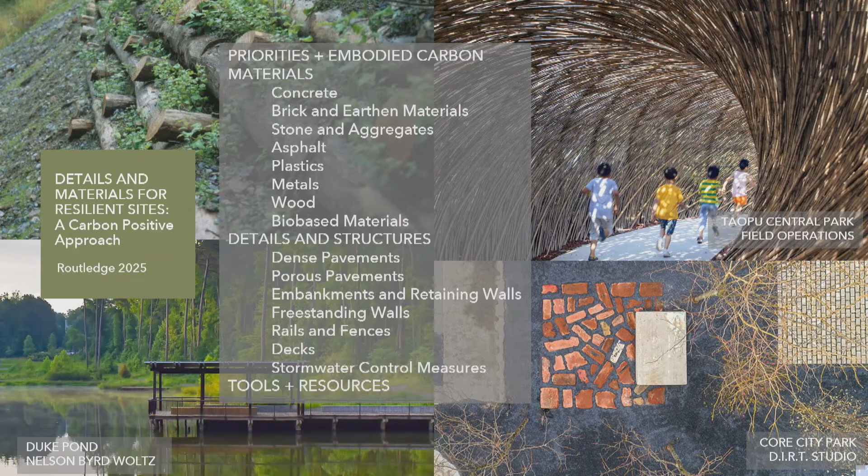But for the past 6 years, we have averaged a 1.4 degree Celsius increase in global temperatures worldwide. This is urgent. We can't have incremental change anymore. We need substantive change. I am truly fearful about what is happening to our climate. So I am building on Pamela and Chris's work with the intention to provide landscape architects with tools to meet the Climate Action Plan goal. I'm writing a book with the working title of Details and Materials for Resilient Sites, a Carbon Positive Approach, that will provide a roadmap for low carbon site construction.

During this fellowship, I have crunched the numbers and quantified just how big of an impact site construction materials have. Here's a parking space. We all know how big that is, right? And here is its carbon footprint. It's bigger than the parking space. This is a sphere 10 meters in diameter for a concrete parking space. 80% of the embodied carbon of a built site is from the construction materials used to build it.

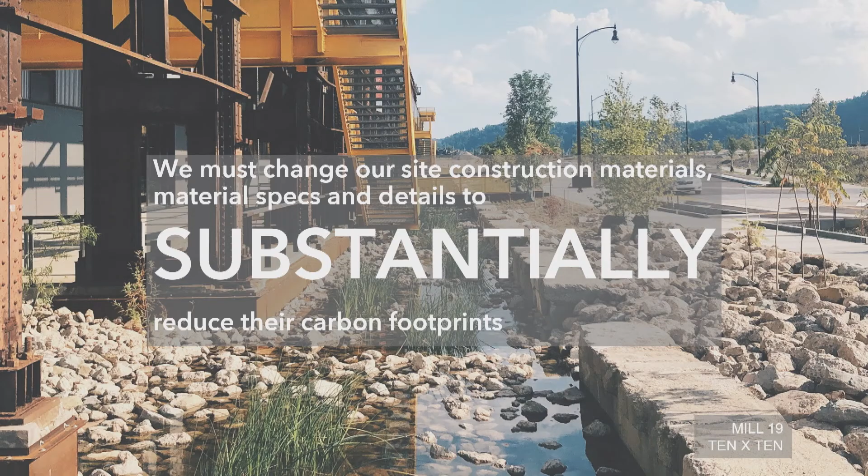We cannot have incremental change. We've been working on that since 1999 or even longer. We are not going to meet the goals of the Climate Action Plan unless we have substantive change, unless we make a radical shift in our material specifications and detailing to decarbonize construction. There are a variety of solutions that we can use to effect substantive change. And these are the approaches that I'm covering in my book, and I'm going to take you through some of them this evening.

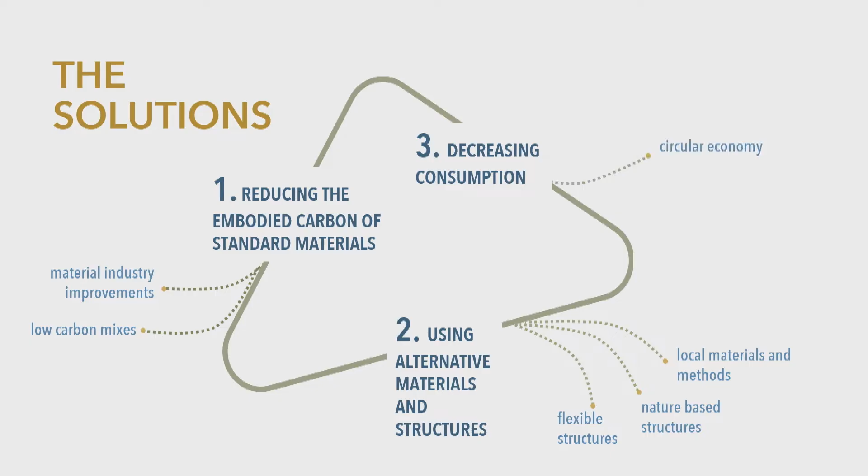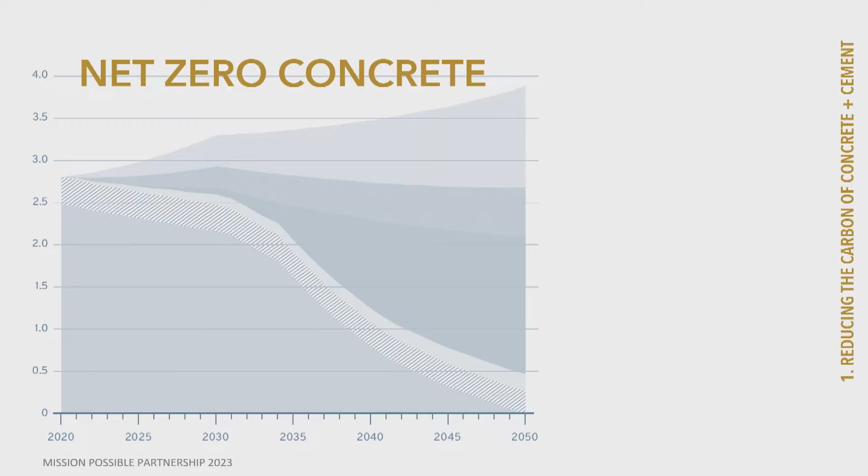The first is to reduce the embodied carbon of standard materials. We are always going to use concrete, and that's fine, but we can make improvements in the materials industry from the supply side. We can make improvements from the demand side by specifying lower carbon mixes. So what does this mean? And I'm a little bit picking on concrete because concrete is responsible for 7 to 8% of all global emissions. Remember our parking space. The industry has plans to decarbonize and achieve net zero by 2050.

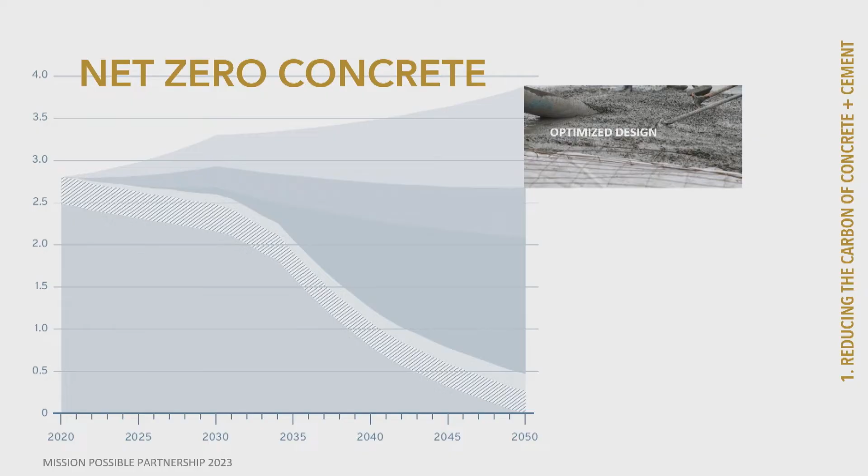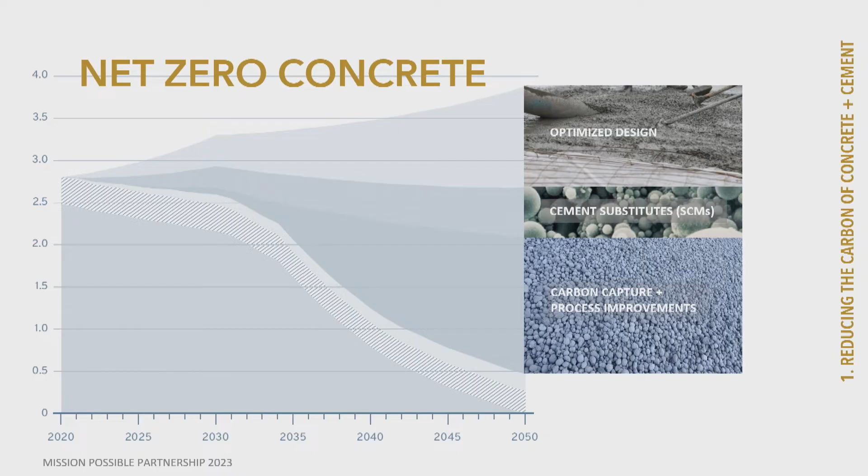The Mission Possible Partnership has laid out a pathway, and various industries around the globe have done that as well. They're all very similar. The first is to optimize design, build smaller, more efficient structures, use the lowest strength concrete for the job. We regularly specify 4,000 PSI when we could be specifying 3,000 PSI for many structures. Using cement substitutes like fly ash, blast furnace slag, calcined clay, et cetera, or even alternative cements that are finding their way to market. The industry can capture carbon and make other process improvements, and then of course, they can use renewable energy. Other industries are making these improvements as well. This is just an example.

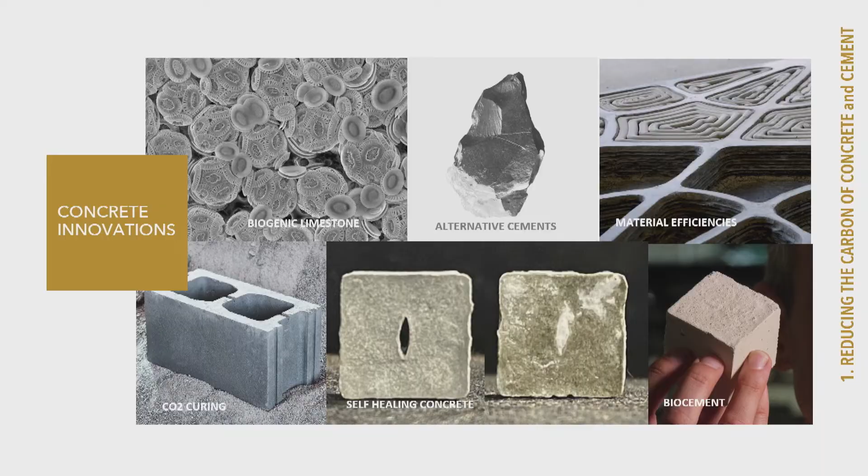The other thing is that there are so many concrete innovations on the market, and we love to read about them. The biogenic limestone, the self-healing concrete. These are great, and they are the future of concrete, but they're not readily on the market yet. So we need to do some things in the meantime. The next step is to use alternative materials and structures.

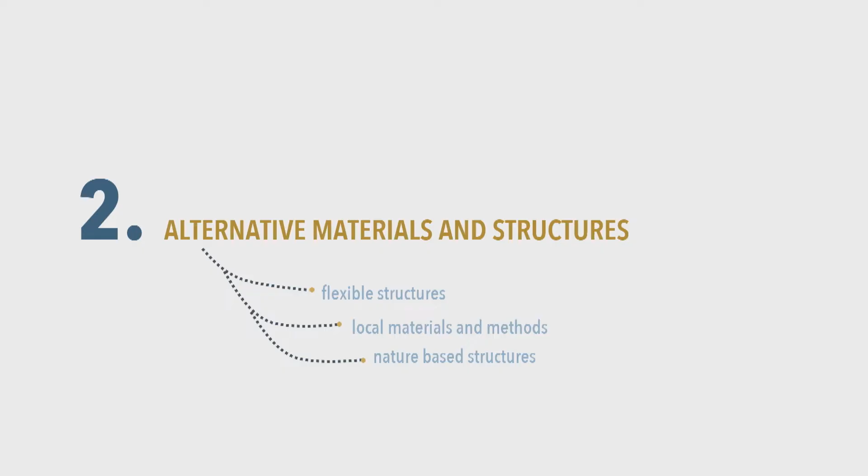Building flexible structures instead of rigid structures, using local materials and nature-based solutions. During this fellowship, I have compared the embodied carbon numbers for many site structures: pavements, walls, fences, guardrails, decks, etc. I've crunched a lot of numbers.

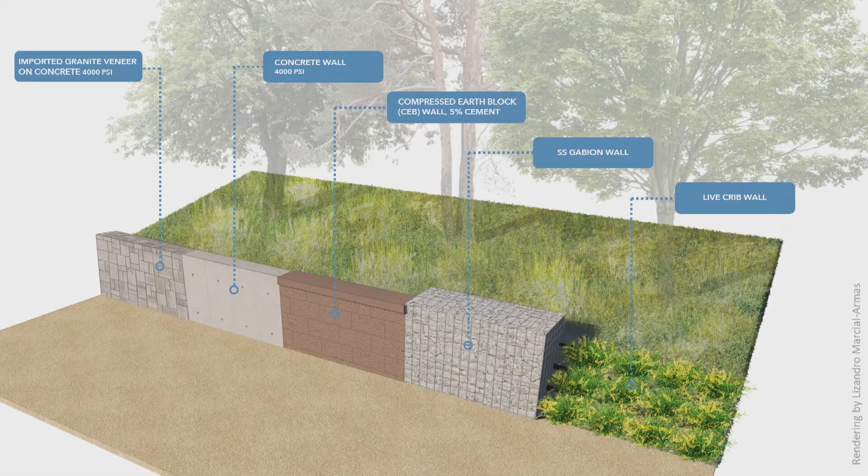In this example, I have looked at a 10-meter long retaining wall. And I included standard assemblies, imported granite on a concrete stem wall, a concrete retaining wall, compressed earth blocks, some alternative materials, gabions, and a live crib wall. I looked at the wall stem, the footings, the drainage behind the wall, et cetera, and crunched the numbers for these. These figures are for the cradle to gate phases of the materials. I did not factor in transportation to the site.

Here are my results, and here's a little bit how to look at it. Along the bottom are all the structures, the granite veneer wall all the way over to the vegetated crib wall, and along the side are low, medium, and high for embodied carbon. And just to give you some context, the 3.3 tons of CO2 equivalents for the imported granite veneer wall, 3 tons, think back to our parking space example where a ton is 10 meters across.

All right, so that's not the full story though, because we can look at ways to reduce the embodied carbon. For instance, if we use domestically quarried and worked granite, not domestically quarried and sent overseas and sent back granite, we can reduce the embodied carbon by 25%. If we use cement substitutes, we can further reduce it to 33%. And if we make just a thinner wall, if we do a 9-inch thick wall instead of a 12-inch thick wall, we get down to 43%. So we're starting to come in line.

We can do the same thing with concrete. You can knock 15% of the embodied carbon off just by using 3,000 PSI concrete instead of 4,000 PSI. That is the easiest fix in the world. I'm not saying build weak structures that are gonna fail, but I'm saying use the correct PSI, don't over-design. Using 50% cement substitutes brings it down further, and then all the way to 47% by using a 9-inch thick retaining wall instead of a 12-inch thick wall. We can even improve the alternative materials by using cement substitutes here as well.

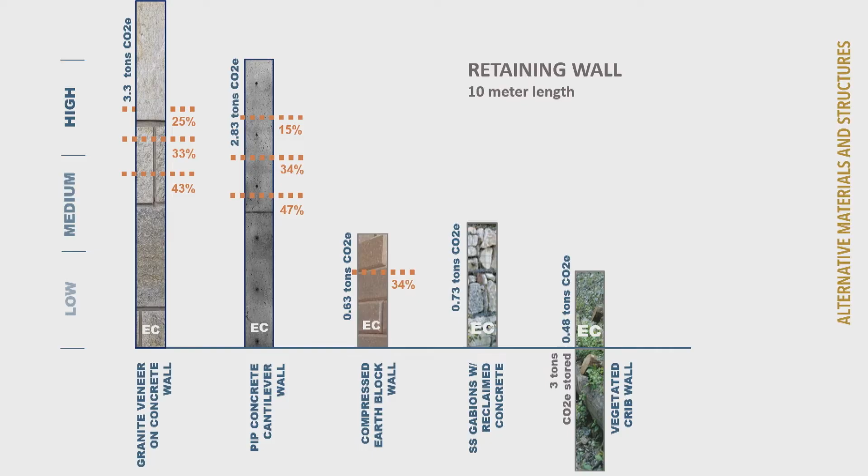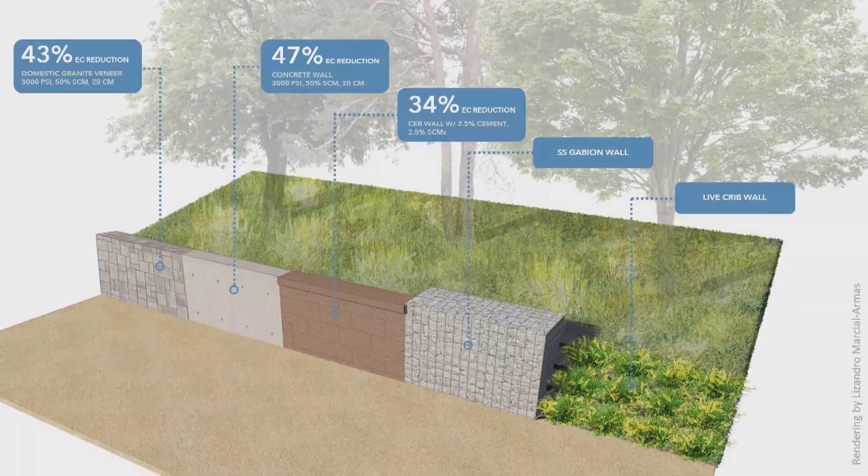But the only wall here that's going to sequester carbon, that's going to store carbon, is the vegetated crib wall, and it will store 3 tons of carbon equivalents for a 10-meter length of wall. So the lesson here is that we can use standard materials, but we just need to change the way that we specify them with alternative mixes, smaller structures, local materials.

All right, so in a few minutes, I'm going to tell you we need to move substantially toward bio-based materials. So I thought I'd show you a deck board comparison that I did. This is decking for a 9 by 12 meter deck with 16-inch joist spacing, and the deck boards sized for that span. You also see replacement factors, because not all of these deck boards are going to last the same amount of time. For a 30-year deck, we will have some replacements with some of these deck boards, and so those are also factored in with the embodied carbon.

So here you see the embodied carbon of the three woods, the pine, the pressure-treated pine, the thermally modified ash, and the tropical hardwood are very similar. This doesn't count the transportation from the factory gate to the site. The tropical hardwood is coming to the US from South America or Southeast Asia, which is quite a long way. The fused bamboo, unfortunately, is coming from China, because it's not currently produced in the US, although I wish it would, because it's a great product.

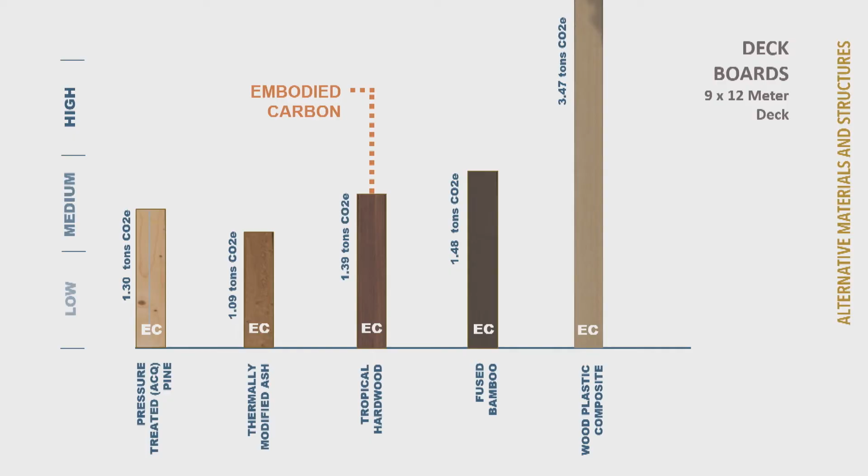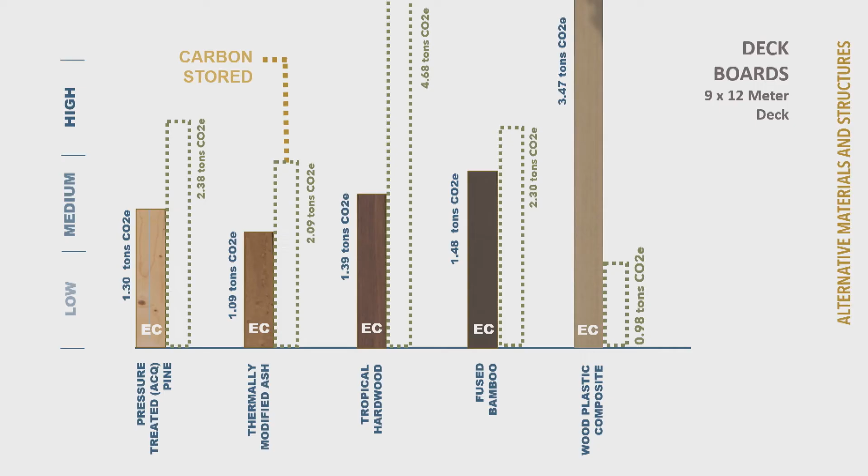This is the carbon that is stored in this decking. This decking can be considered carbon neutral or even carbon positive if the wood is harvested for the decking and new trees are replanted on the site where the wood was harvested. So that's entirely plausible with the pine and with the ash, but it's not going to happen with the tropical hardwood. It's just not. So there's a huge impact there. Stay tuned on the carbon stored story, because it's being discussed right now whether it's legitimate to actually count the carbon stored in lumber and other bio-based building products.

But most importantly here, we see the ecosystem impacts. And I've defined that as a combination of habitat loss combined with the likelihood of reforestation. To build our 9 by 12 meter deck, it's entirely possible that we could get certified lumber for the pressure-treated pine and the thermally modified ash. I'm not sure that we can trust certified lumber when it's tropical hardwood, because there is a lot of fraud in the industry, particularly in Brazil. But also, very little tropical hardwood is plantation grown.

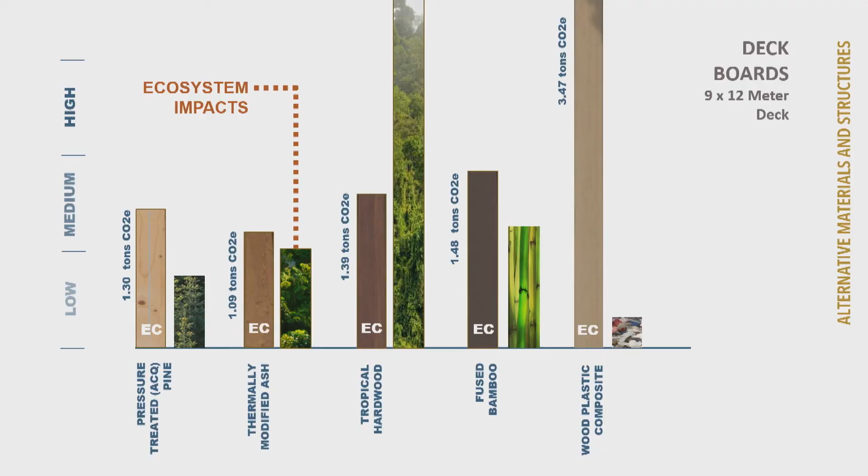So to obtain our tropical hardwood, we would need to disturb 1.68 acres of rainforest. It's not that we need to cut down all the trees, it's that the tropical hardwood trees that we derive the lumber from don't occur that often in the rainforest. For instance, an ipe tree occurs on average once every 5 acres. So that's why we need to cut down 1.68 acres.

And even if we just selectively harvest the tree, studies show that the rainforest, when it loses its keystone tree, will decline within 5 years and become pasture land. So the other thing that we need to consider is the carbon sequestration consequences of that. When the forest is gone, our tropical hardwood deck will result in a net loss of 25 tons of carbon absorption each year.

So not all bio-based materials are created equal. And I think that 4 of the 5 decking options are pretty good. Some you could say are better than others, depending on where your site is. But there's one option that we should be avoiding.

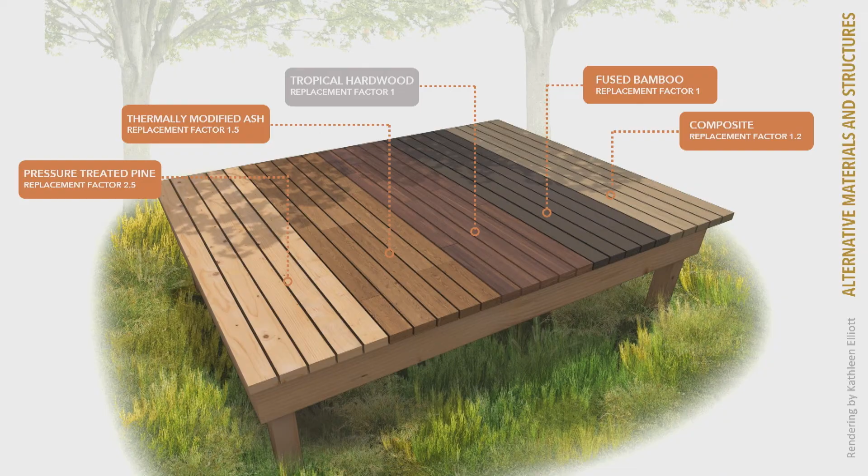Alrighty. The next approach is to decrease consumption. Since 2020, the anthropomass, the mass embodied in our built environment, has exceeded all of the biomass on our planet. We have just mined and built so much. We need to look at a circular economy, and we need to build smaller structures, keep structures in use for longer, and optimize them. We need to work toward the image on the far right.

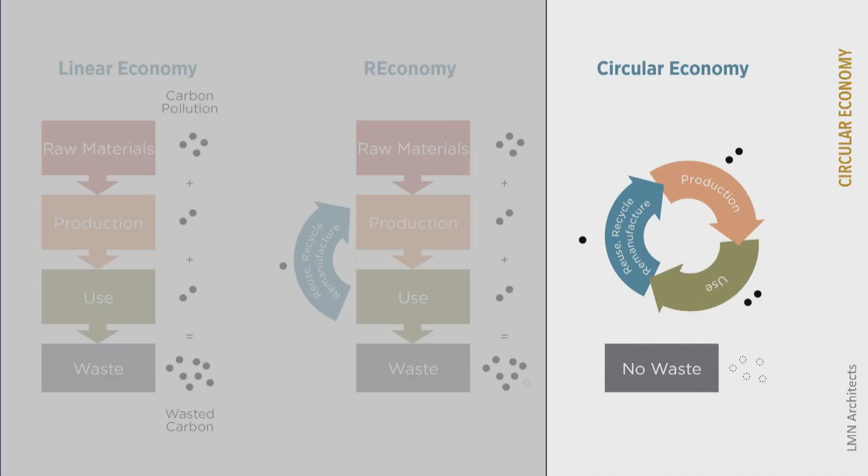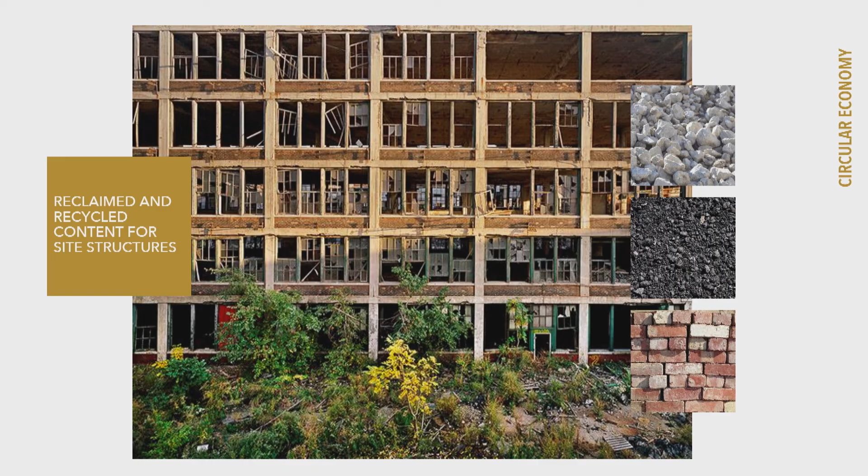Right now we're in what I would call the re-economy. We reuse, we recycle, we feel great about it, but we still go back to the natural environment and mine it. 64% of our waste stream in the US is demolition debris. I would argue that we need to mine the built environment instead of mining the natural environment. And I'm going to say it again. We need to mine the built environment instead of mining the natural environment.

Ideally, we'd keep this building whole, right? We wouldn't knock it down and crush it up. But if we do that, the landscape, the site and infrastructure construction is the place to reuse that material in asphalt, concrete, and aggregate bases.

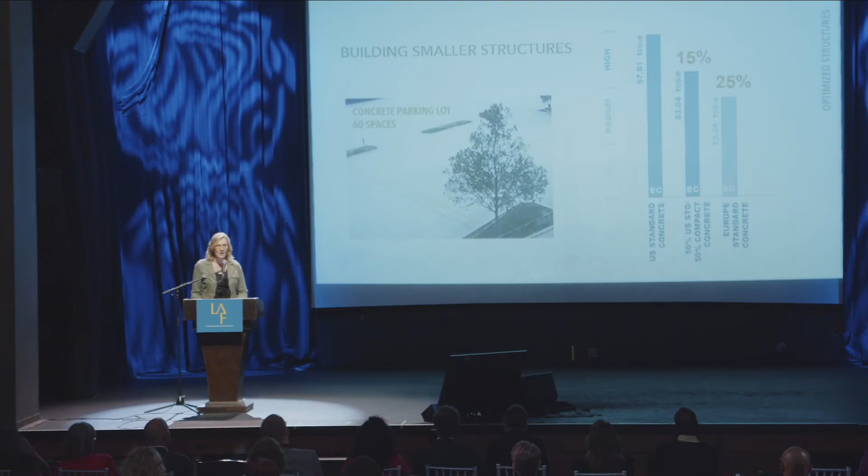Another approach is just to use less material. Everything in the US is big. I was just in the UK for a couple weeks and seeing how much smaller roads, parking lots, et cetera are. We can build smaller structures, and if we do, we can reduce our resource use by 25% if we build to European standards. We can also reduce our cost by a pretty good chunk as well.

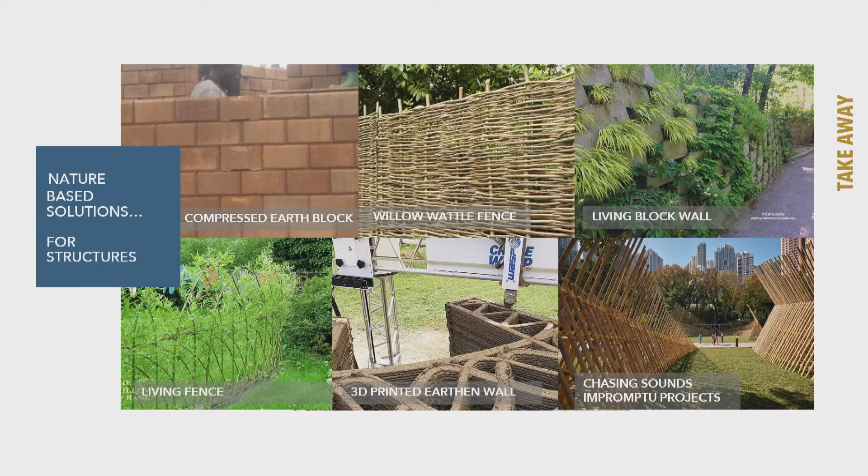All right, so many takeaways from this project. I've come to multiple realizations. We employ nature-based solutions to provide ecosystem services of flood mitigation, air pollution uptake, water quality improvements, et cetera. I believe that we can use nature-based solutions for site construction as well. We need to move into a bioeconomy with construction materials. After all, true sustainability relies on renewable, regenerative materials like wood, bamboo, and living structures. And they store carbon.

But you might say, well, you know, a living crib wall doesn't belong in downtown Chicago. Well, yes, it does, and it should. We just need to make an aesthetic shift. And I would argue that we've made an aesthetic shift in our field in the last 3 decades to loving and embracing the weedy, shaggy-looking native plants, right? Can we embrace different structures as well?

So I used this iconic landscape at the Dallas Museum of Art Sculpture Garden to explore this aesthetic shift a little bit. The current landscape, and I love Dan Kiley, he's my hero, I mean no disrespect, but I just wanted to explore this. The granite veneer on concrete walls, the seat walls are also granite veneer on concrete, the pavement is cast stone.

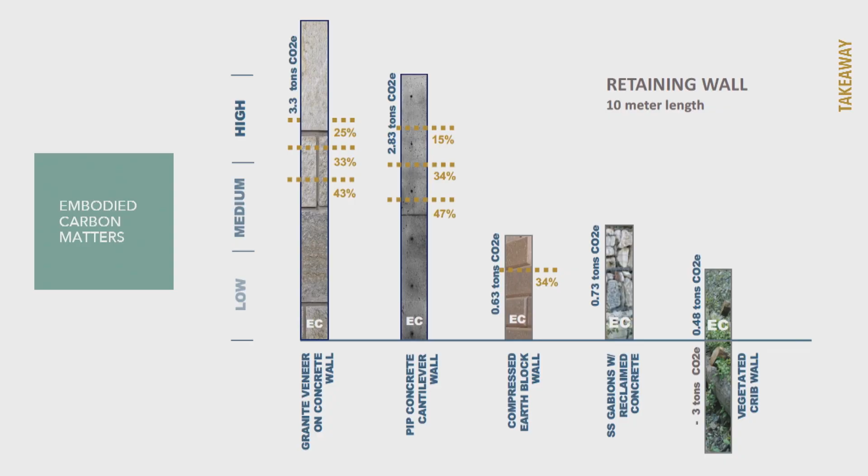What if we switched out some materials? We did gabions with reclaimed concrete slabs. We did Texas limestone quarry block. We did stabilized stone dust pavement. We would save 83% of the embodied carbon. And this is even better for everybody who loves the bottom line. It would be a 66% cost reduction also. This is a win-win. Embodied carbon matters. Trade-offs, material mixes, smaller structures.

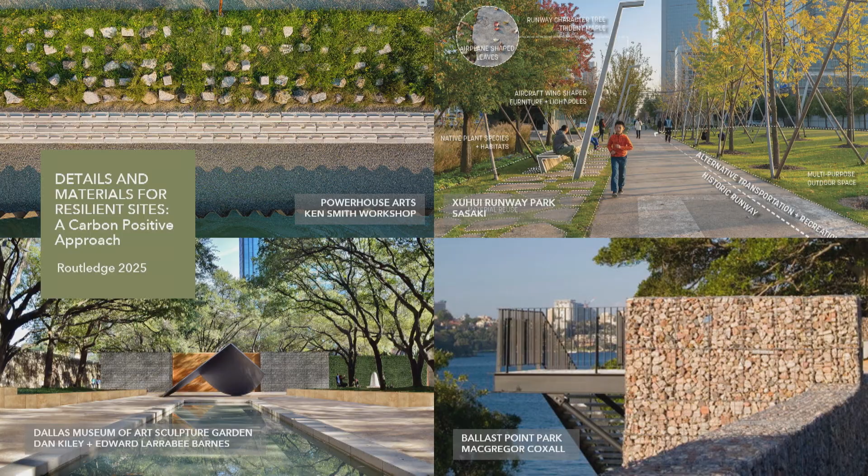And I'd like to leave you with a challenge. I'd like to challenge you to make one choice on a material mix or a structure that is substantially lower carbon. And then on your next project, make 2 choices, do 2 things that are substantially lower carbon. And let me know about your lessons learned and your success stories and even your barriers encountered. The time to substantially reduce our carbon footprint is now. And I look forward to seeing your low carbon work.